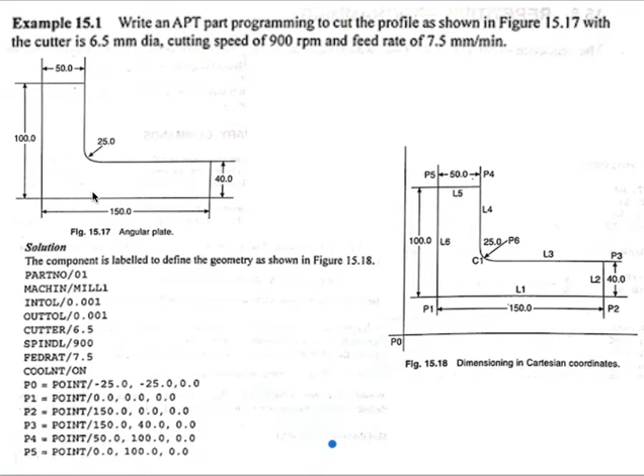Next is OUTTOL, the outside tolerance. As inside tolerance is for the inside, this is for the outside: the outside tolerance indicates the allowable tolerance between the outside of the curved surface and a straight line used to approximate the curve. So this is how we have set the tolerance.

Next is the cutter. For the cutting tool, we need to set commands first, so we need to set a cutter as well. The cutter has a 6.5 mm diameter. So this is CUTTER/6.5 mm diameter, and spindle speed is 900 rpm, so SPINDL/900 rpm.

And what is the feed rate here? We have got a feed rate of 7.5 mm per minute. So this is FEDRAT/7.5 mm per minute. When it starts, the coolant also gets started, so put COOLNT/ON.

Next, come to the point-to-point motion commands now. So coolant on, when coolant on, that point P0, that we need to set. So how could you say point, this is POINT/, from here to here this is minus 25.0, this is x-axis, again minus 25.0, this is below P1, from here this is minus 25.0, and z-axis is 0, isn't it? So there are two axes, so z-axis is totally 0 here. So we have set this P0 for x and y axis.

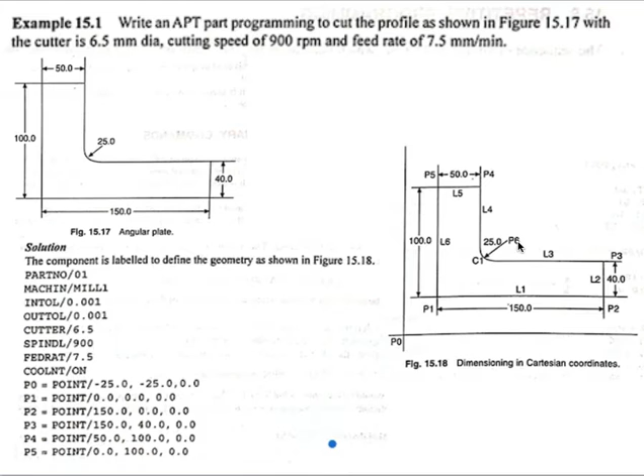At P6, this is point P6, and this radius is how much? 25.0, that is 25 mm. So this is the point P6. So if you see here, this 50 plus 25, how much it is? 50 plus 25 is 75. This is in x direction. And what about y direction? This 40 plus 25, that is 65, isn't it? So x-axis is 75.0, y-axis is 65.0, and z-axis is 0.0.

Come to line 1, that is from P1 to P2, LINE/P1, P2, and line 2, LINE/P2, P3. Are you getting this? Next, C1, the C1 circle, the center is P6, and radius is how much? 25.0, isn't it? Right? C1.

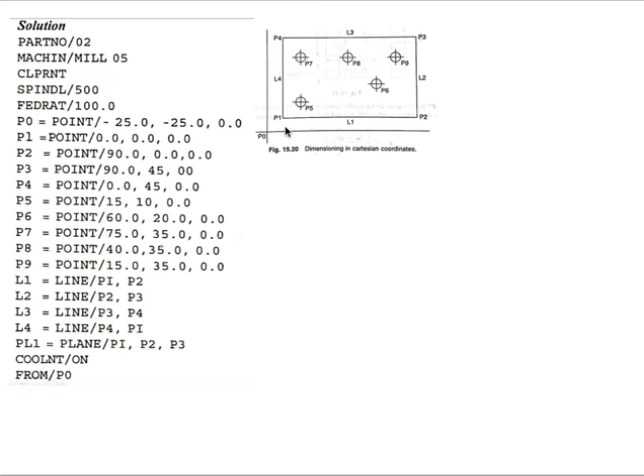And then next, the spindle speed is 500 and feed rate is 100 mm per minute. Next, set point P0: this is minus 25 and this is minus 25, and the z-axis is 0.

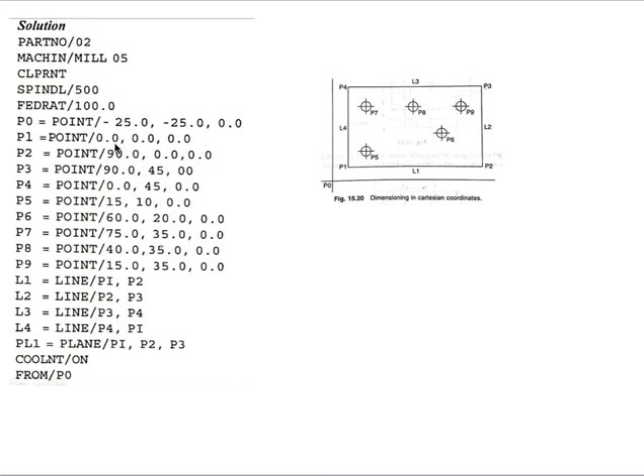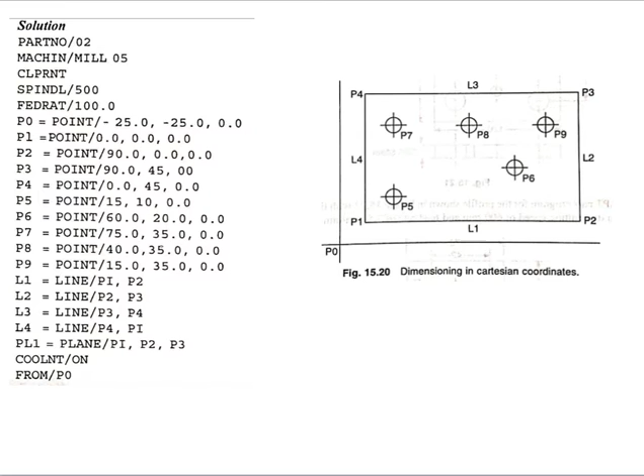So P1 is point 0,0,0 - x-axis 0, y-axis 0, z-axis 0 - so starting point is here. Then P2 point, the length given is 90, this is 90, and this is 45, right?

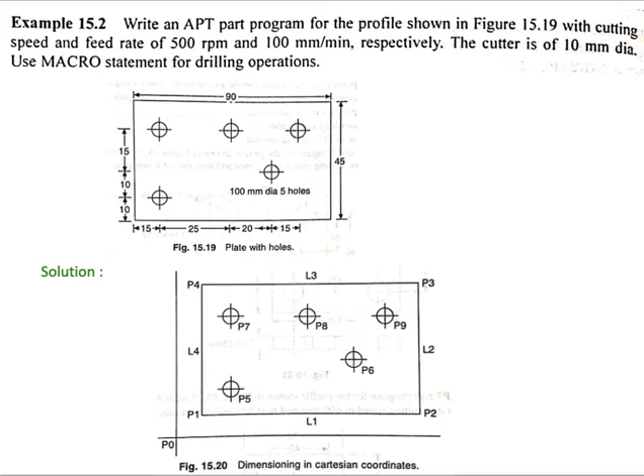We'll take it together so we'll understand better. P1 is here: 0,0,0 - x-axis 0, y-axis 0, z-axis 0. P2's x-axis is 90, y-axis is 0 since we set P1 as 0,0,0. So P2 is x-axis 90.0, y-axis 0.0, z-axis 0.0. Next P3 point: x-axis is 90, and y-axis is 45, so write 90.0, 45, 0.0 - you need to write 0.0.

P4, similarly, x-axis is 0, y-axis is 45, and z-axis is 0.0. So this is 0.0, 45.0, and 0.0.

Then P5, where is P5? Here, isn't it? So P5 is here: x-axis is 15, y-axis is 10, and z-axis is 0.0. So we have to write P5 as 15.00 - from here to here is 15 on the x-axis, y-axis is 10, and z-axis is 0.0.

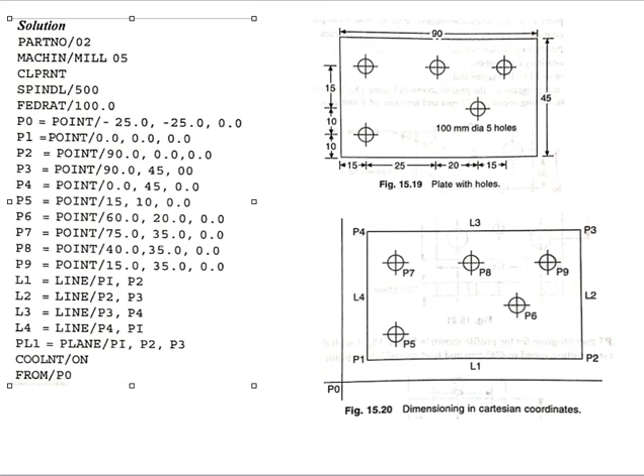From L1, past L2 - forward L2 from past L3, so forward L2 past L3. Similarly, go left L3, go left here, go left L3 past L4 - this line has to pass, past it.

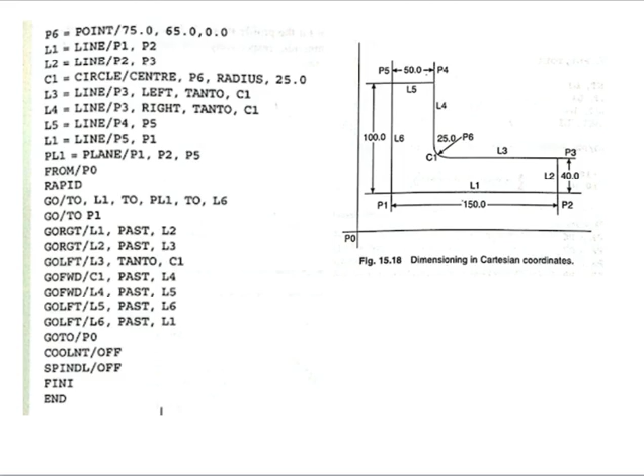Go to finish, and then go to P0 again, coolant off, and then spindle off, then end. After rapid here, we need to go like this: go to P0 again, the tool comes to the initial state P0, then coolant off as we see here, then spindle off, then finish, then end. After that, this program is saved, and then we can do the machining.

So this is what APT part programming is. We'll see a next video on the next topic. Thank you one and all.